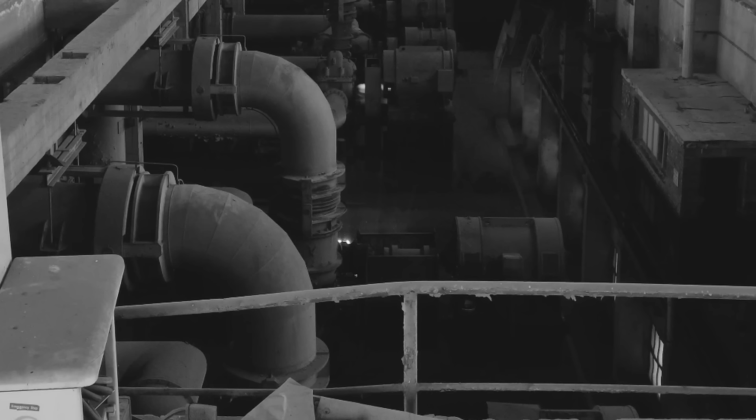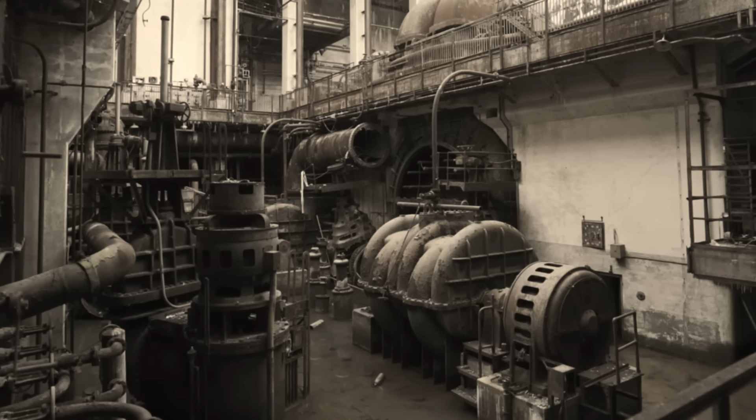But here's what makes it worse. This wasn't an accident. Every gauge, every rivet, every safety system had been deliberately compromised to squeeze more power from a machine already pushed beyond its limits. So the question isn't whether this explosion could have been prevented. The question is, how many others saw it coming and said nothing?

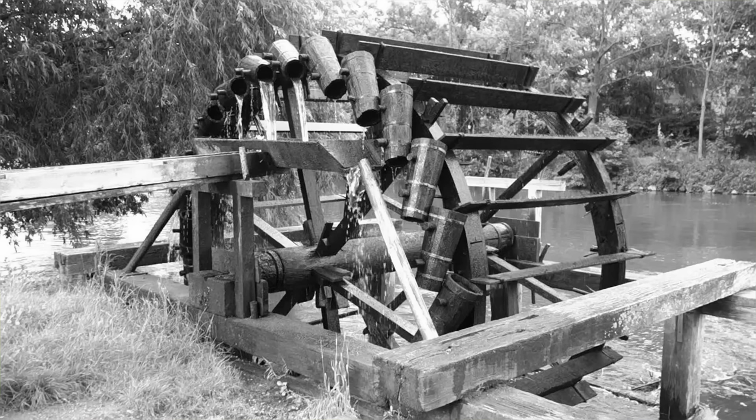Now, let's go back to where it all started, to the moment when American factories decided that more power mattered more than the men who made it run. The American factory floor in 1880 runs on a single, brutal truth. No steam, no money. Every loom, every lathe, every stamping press connects by belt and pulley to a central power source. For decades, that source was the water wheel, chained to rivers and seasonal flow.

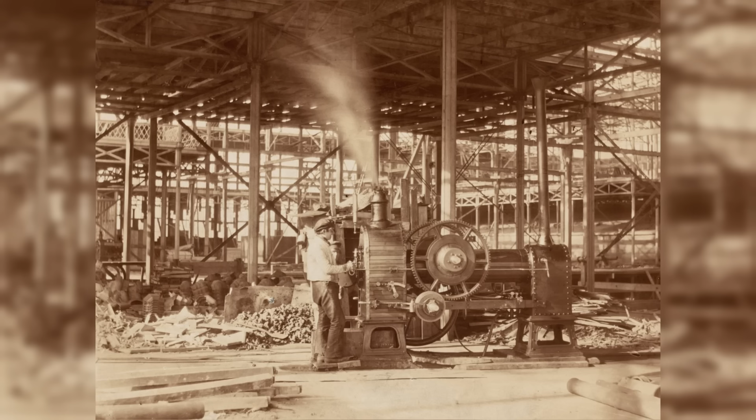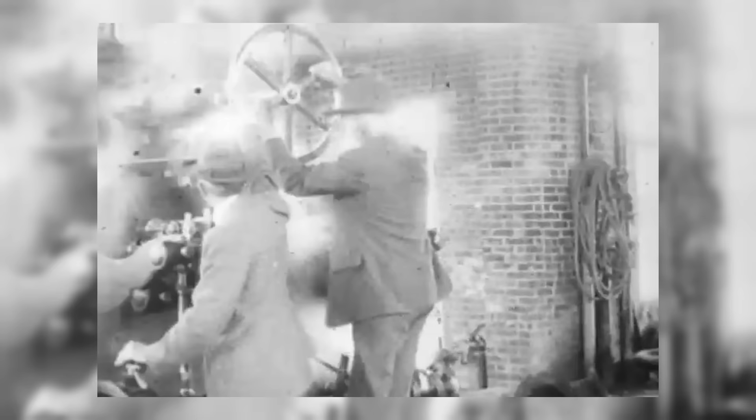One boiler can power an entire textile mill. 2 can drive a steel foundry's rolling equipment. 3, arranged in a battery, can keep a locomotive factory running 3 shifts without pause. The economics are irresistible. Install a bigger boiler, run more machines, hire more workers, capture more market share. But the pressure, literal and financial, never releases.

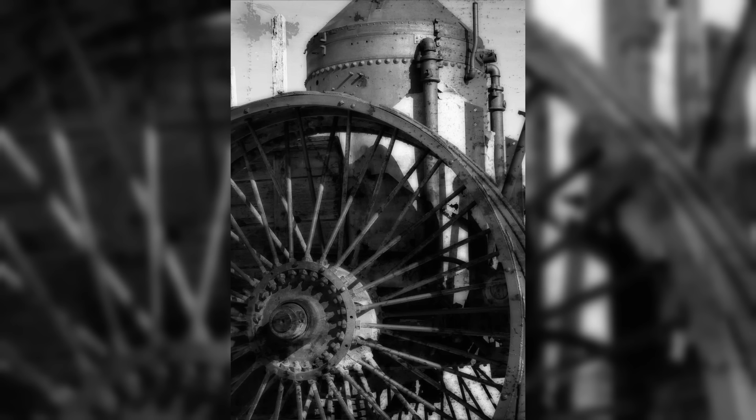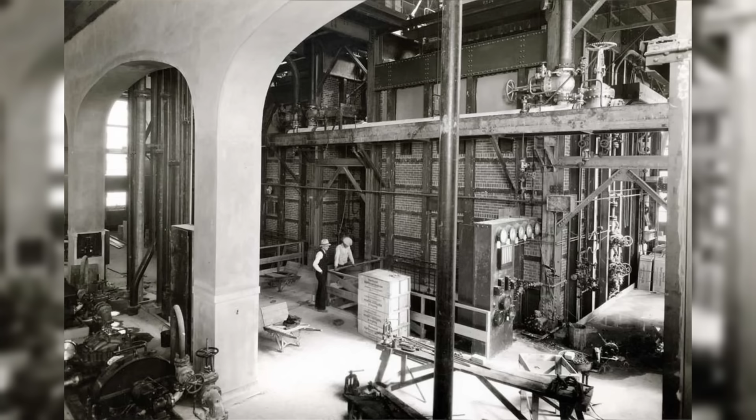Factory owners face a choice. Operate at design capacity and watch competitors outpace you, or push past the red line and multiply your output. Most choose the latter. They connect boilers in series, feed them cheaper coal with higher sulfur content, and delay maintenance shutdowns that cost production time. What happens when an entire industry decides that maximum capacity isn't enough?

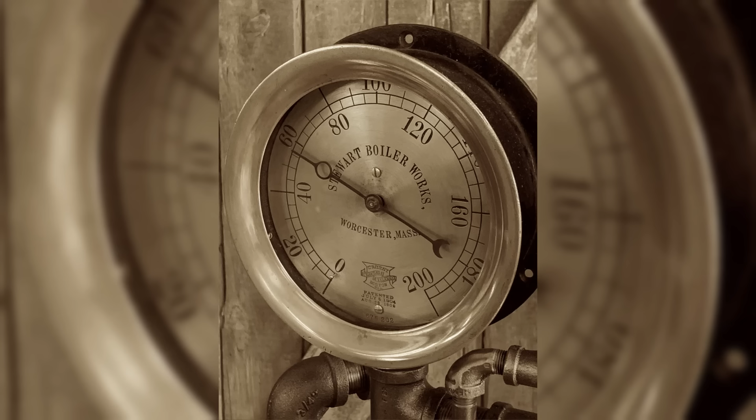The boiler room becomes the factory's literal and metaphorical heart, a chamber where heat, pressure, and human desperation concentrate into something unstable. The men who tend these iron giants work 12-hour shifts in temperatures that reach 120 degrees. They shovel coal into fireboxes that glow white. They watch gauges that measure forces capable of tearing steel. Their job isn't to keep the boilers safe. Their job is to keep it running, no matter what the needle says.

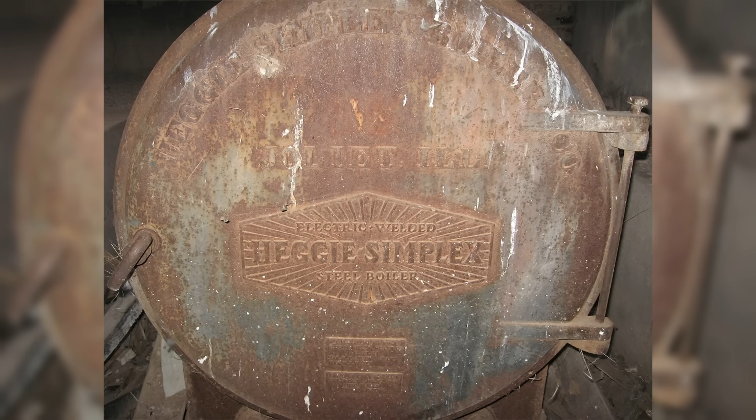By 1890, more than 100,000 stationary boilers operate in American factories, and the number climbs every year. Each one holds enough energy to level a city block. Each one operates under the same unspoken rule: production over caution, profit over safety, output over everything. The stage is set and the pressure is building.

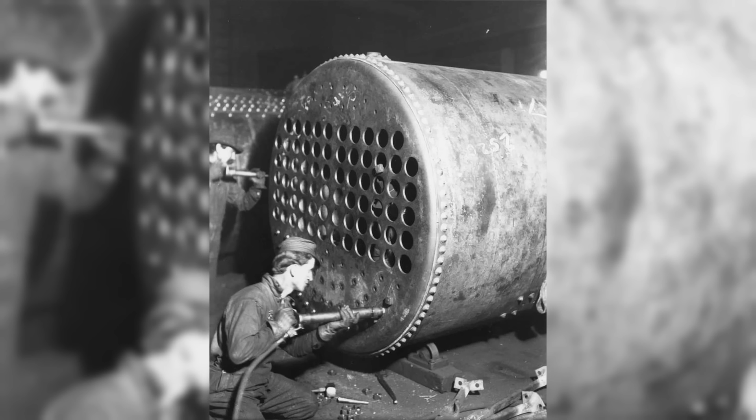A boiler shell looks solid until you understand how it's made. Thousands of hand-driven rivets hold overlapping iron plates together, each one hammered hot into pre-drilled holes by men working in teams of 4. The 1890s standard calls for rivets spaced every 3 inches along a seam, overlapped in a pattern that distributes stress across the joint.

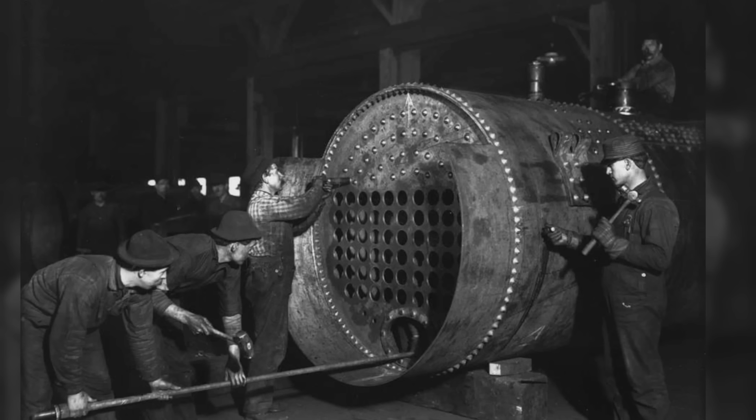Miss one hole by 1/16 of an inch, and you create a point where metal flexes unevenly under pressure. Let a rivet cool crooked, and the seal begins to weep. Multiply these small errors across a 30-foot shell, and you've built a structure that's only as strong as its weakest connection. Let me take you to Hartford, Connecticut, in 1854.

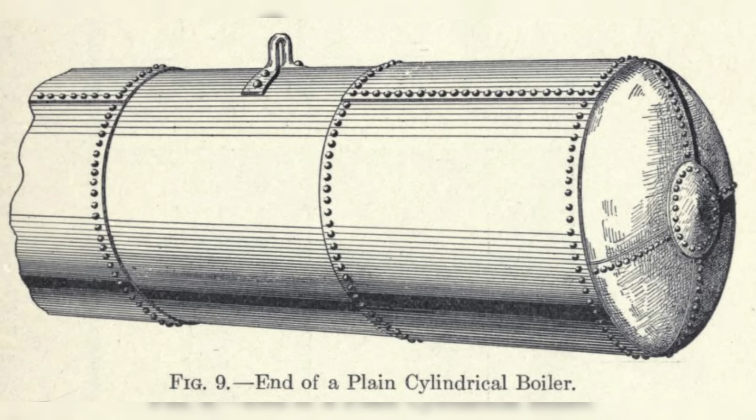The Fales and Gray Car Works boiler explodes during a routine morning startup, killing 21 workers and injuring another 50 more. Investigators recover fragments showing rivet holes drilled off-center, allowing steam to force its way between plates. The company had accepted the boiler from the manufacturer without independent inspection. The shell was defective from the day it was installed, but rivets are only the beginning.

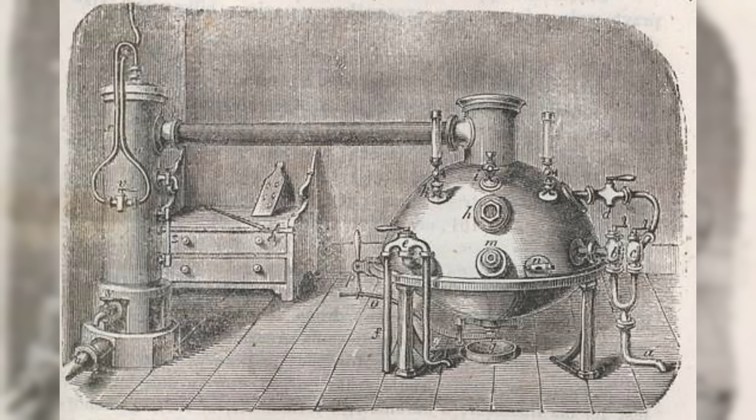Water chemistry attacks iron in ways most operators never see. Let water sit stagnant and oxygen begins the corrosion process, pitting the interior surface. Feed a boiler with mineral-heavy water and scale builds up, insulating the iron from the cooling effect of the water itself. The metal overheats, it softens. Under constant pressure, it begins to bulge.

Inspectors in the 1890s routinely find boilers with plates worn from half an inch down to the thickness of a dime, still in daily service because shutting down means lost revenue. What does a factory owner see when he looks at these warnings?

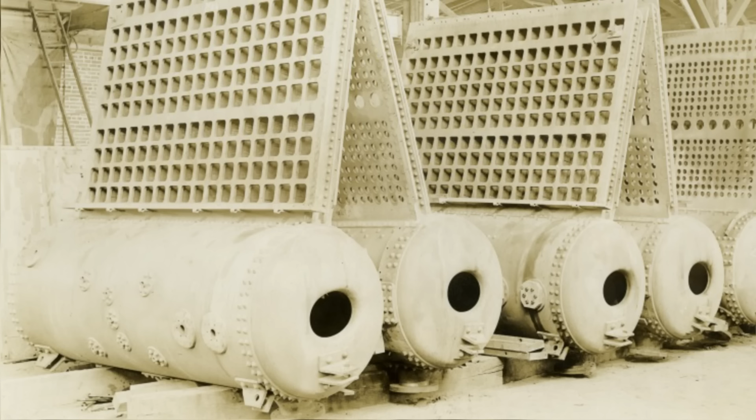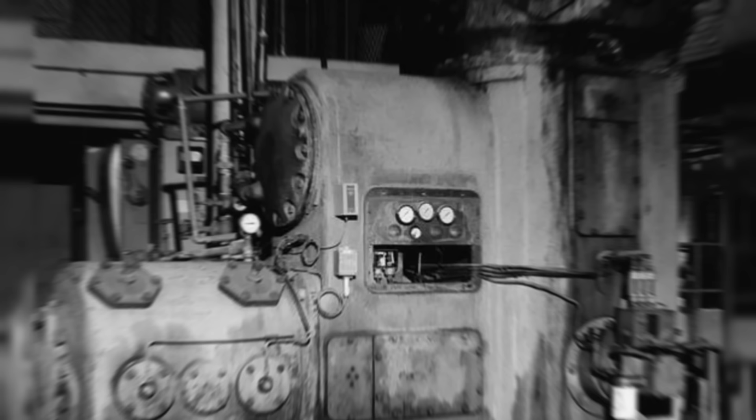The boiler inspector from Massachusetts reports finding 347 boilers in dangerous condition during 1893 alone, with 89 ordered immediately removed from service. Yet, records show that 34 of those condemned units returned to operation within 6 months, their owners having made minimal repairs or simply moved them to facilities outside the inspector's jurisdiction.

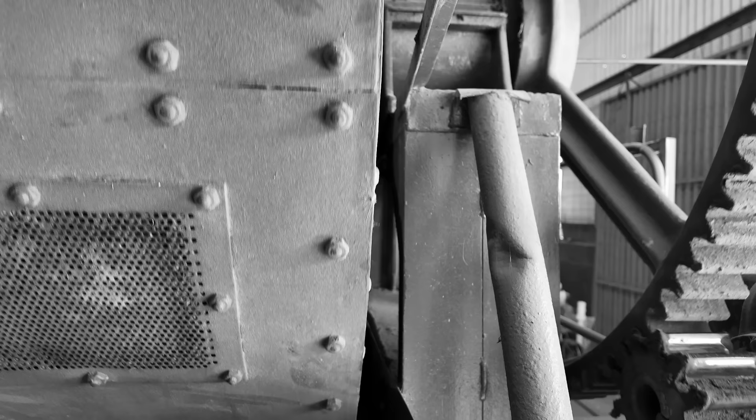The evidence is physical and damning. Recovered boiler fragments tell stories their operators never lived to share. Cracked welds, sheared rivets, corrosion patterns that follow waterlines like rust-colored maps. These aren't mysteries. These are predictions written in metal, ignored until the moment they come true.

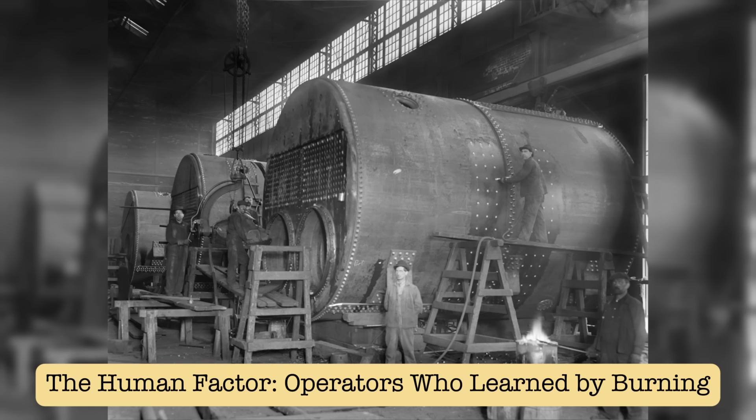The man who controls 3,000 horsepower rarely knows what he's controlling. Most boiler operators in the late 1800s receive no formal training. They learn from the previous shift worker, who learned from someone before him, creating chains of knowledge based on habit rather than understanding. A new hire might get 3 days of observation: how to shovel coal, how to check the water glass, how to crack the blowdown valve once per shift.

What he doesn't get is instruction on metal fatigue, pressure dynamics, or the physics of steam. He's told to keep the needle in the green and the water above the red line. Everything else is feel.

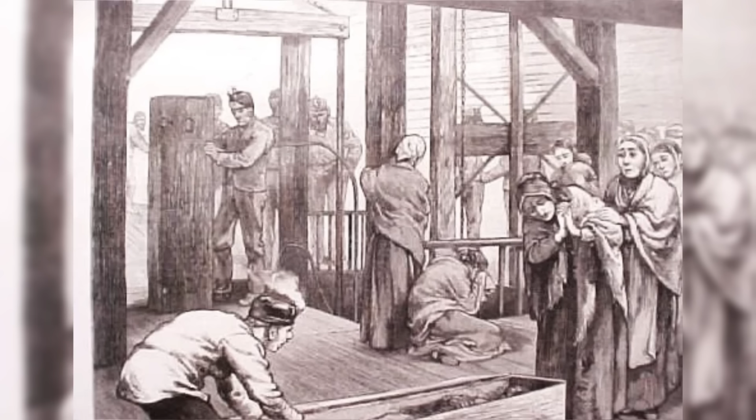Let's go back to Braidwood, Illinois on February 16, 1883. The boiler at Diamond Mine explodes during the morning shift change, killing 69 miners waiting to descend. The operator had noticed the pressure gauge climbing, but assumed it was temporary, a pattern he'd seen before during cold snaps when demand spiked. He didn't know the safety valve had frozen shut overnight. He had no training to recognize the danger. The inquest records his testimony. "I thought it would settle down like it always does."

But how do you measure the weight of responsibility placed on men who can't read the gauges accurately? Survivor accounts describe the impossible calculus. If you shut down for suspicious noises, you're labeled overcautious and risk termination. If you push through and something fails, you're blamed for negligence.

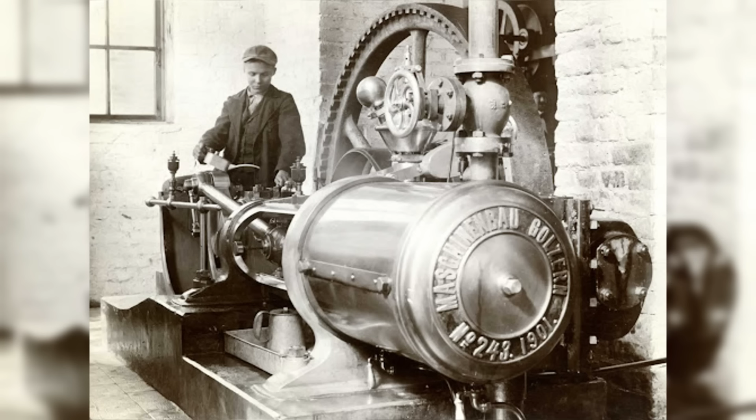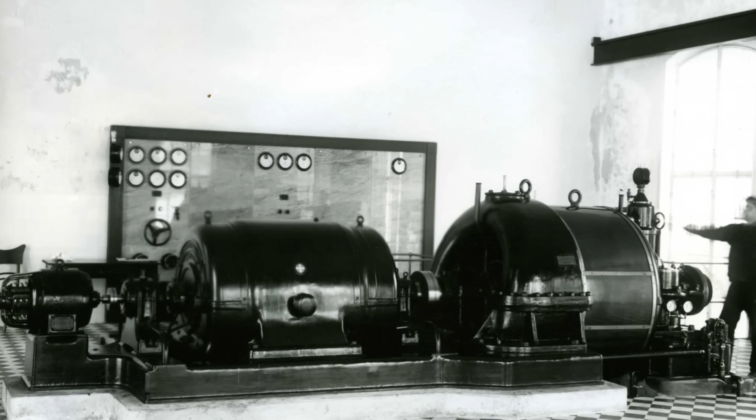The Chicago Tribune reports in 1890 that the average boiler operator earns $2.50 per day and works 6 days per week. Factory foremen, paid on production bonuses, routinely pressure operators to keep steam up regardless of conditions. One documented case from a Pennsylvania mill shows an operator fired after reducing pressure during a water supply interruption, the exact action that likely prevented an explosion.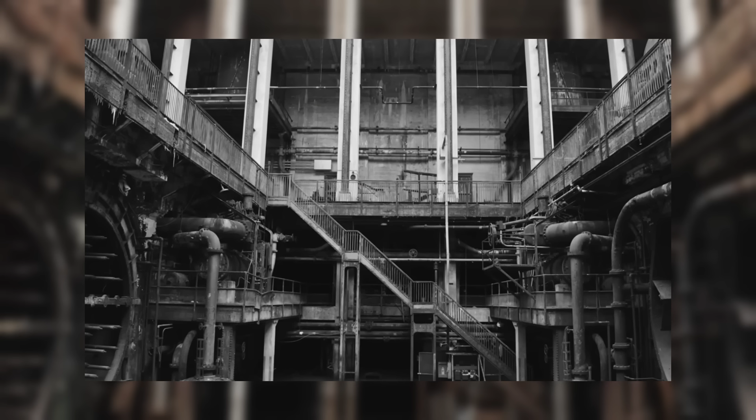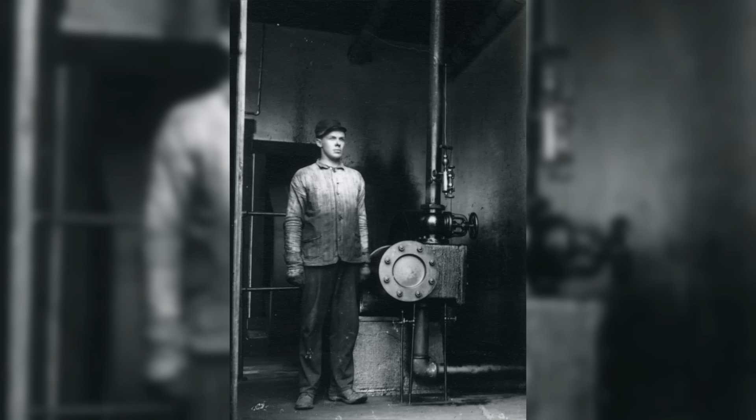The knowledge gap kills in predictable ways. Operators mistake scale buildup in water glasses for safe levels, not understanding that the mineral crust blocks the true reading. They hear banging inside the shell and assume it's normal thermal expansion. They watch safety valves weeping steam and pack them with rags to stop the leak. These aren't acts of stupidity. These are decisions made by men working with partial information in an environment where caution costs jobs and boldness keeps families fed.

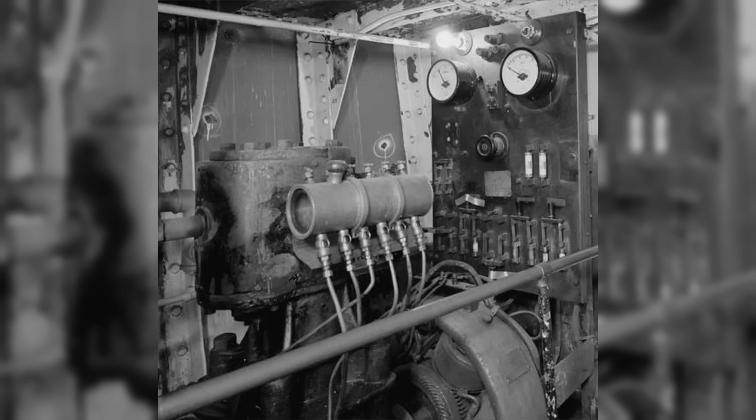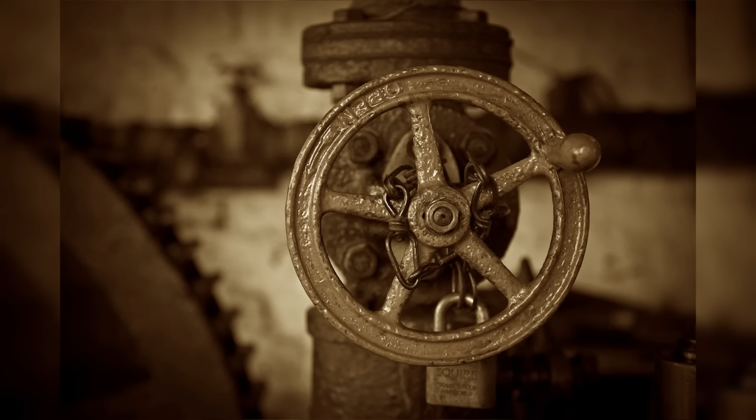The safety valve represents engineering's answer to human greed, and it fails almost immediately. The principle is elegant. A spring-loaded valve set to open automatically when pressure exceeds the boiler's rated capacity, bleeding excess steam before the shell ruptures. Massachusetts law in 1907 mandates safety valves on every boiler, calibrated to release at least 15 pounds below maximum working pressure. The valve is supposed to be the final line of defense, the mechanism that makes catastrophic failure impossible. In practice, it becomes the first thing factory managers tamper with.

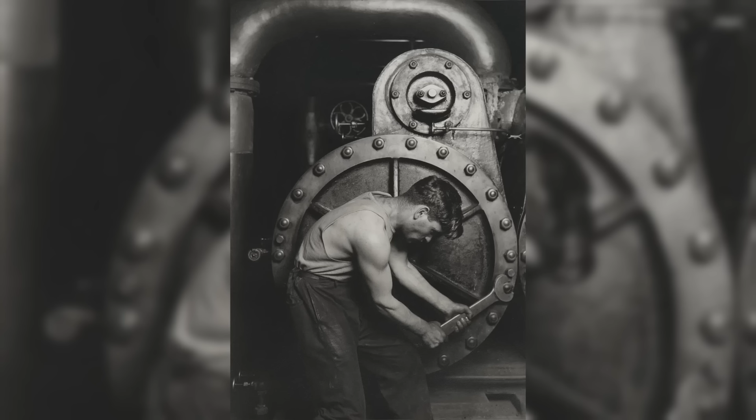The methods vary, but the goal is identical. Some owners wire valves shut with steel cables, preventing them from opening at any pressure. Others file down the valve seat, creating gaps that let steam leak constantly at low pressure, convincing operators the valve is functioning when it's actually disabled. The most common modification involves adding extra weight to the valve's lever arm, forcing it to stay closed until pressure reaches levels 50 or 75 pounds above the boiler's design rating.

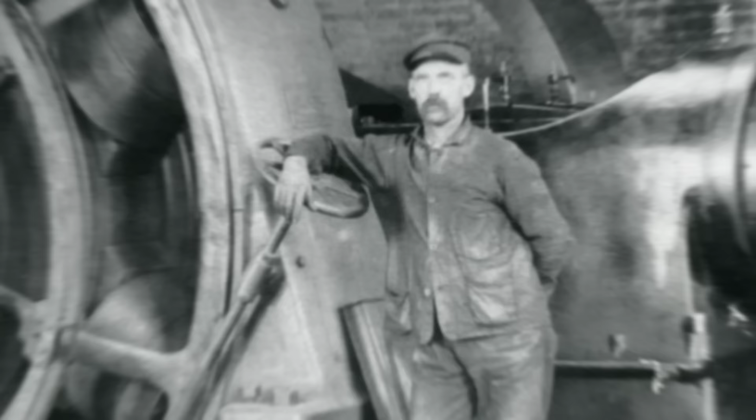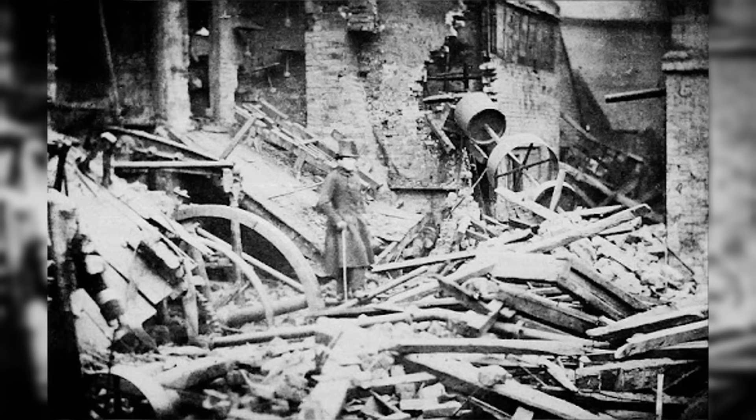Why would anyone deliberately sabotage the only device preventing an explosion? Because every pound of additional pressure means more power transferred to the factory floor, more machines running, more product manufactured per shift. Insurance company records from 1895 show that 62% of investigated boiler explosions involved safety valves that were either modified, disabled, or improperly maintained.

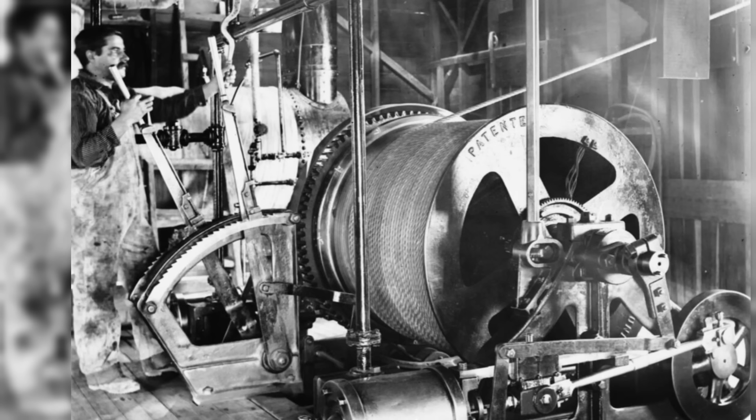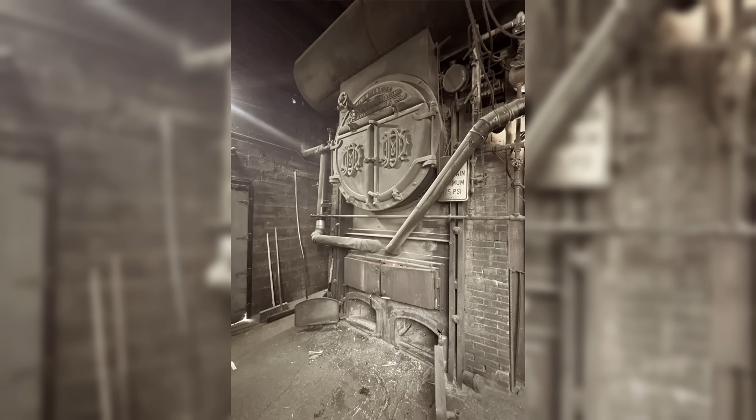The Hartford Steam Boiler Inspection and Insurance Company reports examining 4,471 boilers in 1896 and finding safety valve defects in 2,109 of them. That's nearly half. The numbers don't suggest carelessness. They suggest a system where safety mechanisms are treated as obstacles to profit rather than protection against death.

Brockton, Massachusetts, knows shoe manufacturing, but March 20th in 1905 teaches it something else entirely. The R.B. Grover Shoe Factory employs hundreds of workers across 4 floors, most of them women operating stitching machines and presses. The building sits at the corner of Main and Calmar Streets, a dense industrial corridor where factories pack shoulder to shoulder.

At 7:45 in the morning, 3 stationary boilers in the basement explode simultaneously with a force that registers on seismographs in Boston 12 miles away. The blast vaporizes the boiler room, collapses the first floor into the crater, and sends upper floors pancaking downward.

Workers on the 3rd and 4th levels fall through disintegrating floors into a pit of scalding steam, shattered brick, and twisted machinery. The building's north wall blows outward, showering the street with debris. Witnesses 3 blocks away describe a sound like artillery fire, followed by a rolling cloud of white steam that obscures the entire block. Rescue crews arrive within minutes, but can't approach for nearly an hour.

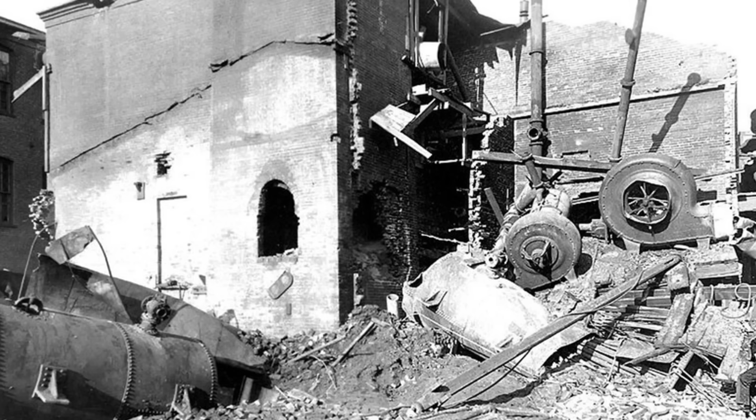What could cause 3 separate boilers to fail at the same instant? The State Inspector of Boilers reveals a cascade of negligence. The boilers, installed in 1890, had never received professional inspection. Water treatment was non-existent, allowing scale buildup that reduced heat transfer and weakened the iron through overheating. Safety valves on all 3 units were found weighted beyond their design specs, set to release at pressures 40 pounds higher than the boiler's rated capacity.

Most damning, the plant superintendent had been warned 4 months earlier by his own maintenance crew that the shells showed signs of bulging. He ordered the crew to stop mentioning it. The superintendent faces manslaughter charges but never serves time. The case drags through appeals and eventually settles with a civil penalty. Although his factory was insured, Captain Grover was financially ruined. The R.B. Grover Company declared bankruptcy and assigned its remaining assets, more than 30 Emerson shoe stores scattered around the country, to its creditors.

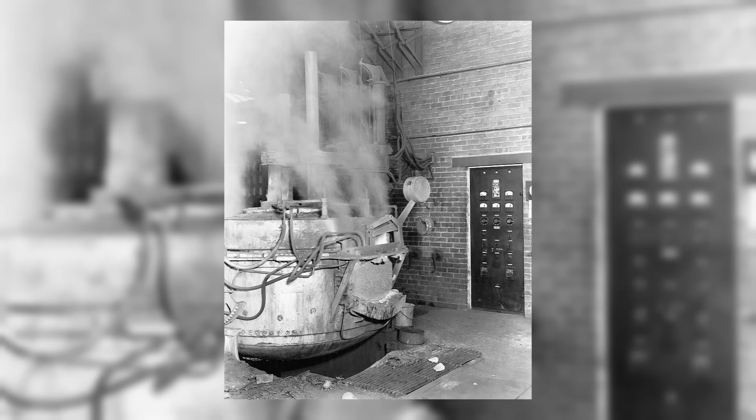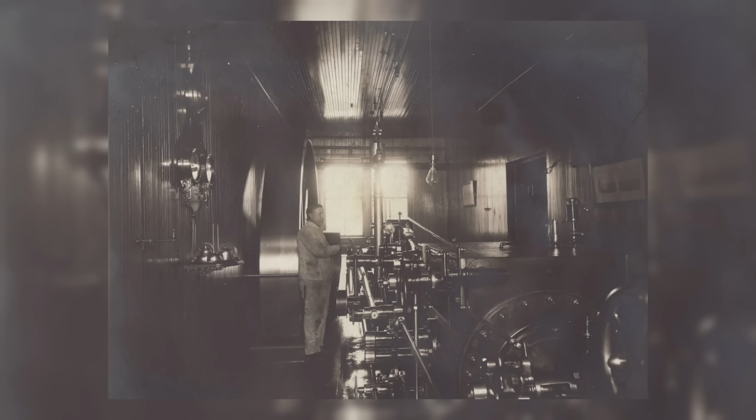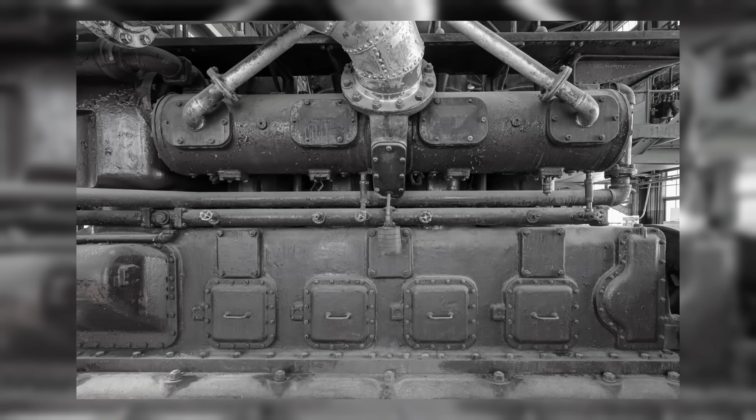Medical literature from the period describes these injuries with clinical precision. Third-degree burns covering 60, 70, sometimes 80% of the body surface. Skin peels away in sheets. Muscle tissue cooks. Survivors describe the sensation as liquid fire, a pain that doesn't fade but intensifies as nerve endings die and then regenerate. Dr. William Warren Potter, treating victims of the Park Hill shoe factory explosion in Haverhill, Massachusetts in 1898, documents the progression in the Boston Medical and Surgical Journal.

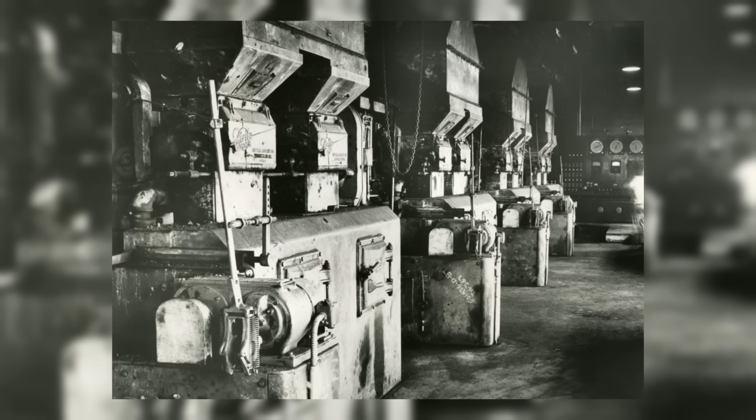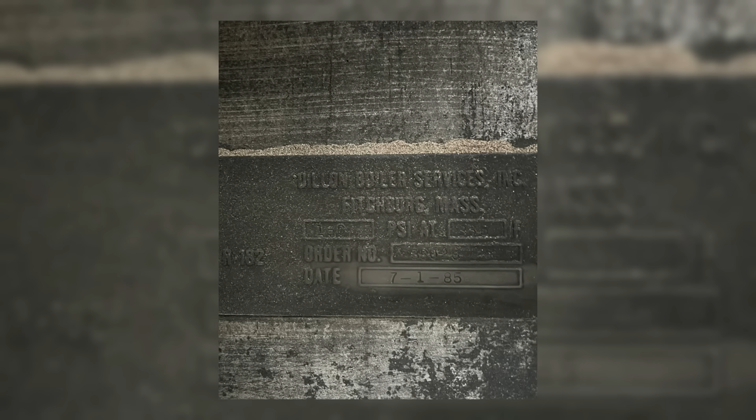Patients arrive conscious and speaking, their injuries not yet fully apparent beneath clothing. Within hours, the skin begins to separate. Fluid loss leads to shock. Infection sets in almost immediately, turning wounds septic before any meaningful healing can begin. Potter reports that of 23 patients admitted with severe steam burns, 19 die within 5 days. The survivors face months of recovery, multiple surgeries, and permanent disfigurement.

Why does steam kill more effectively than flame? The answer lies in heat transfer. Steam carries roughly 5 times more energy per unit volume than hot air. When it contacts cooler skin, it releases that energy instantaneously while condensing back into water, which then continues to burn. Fire burns the surface and moves on. Steam penetrates and lingers. Hospital records from boiler explosion victims show recurring patterns.

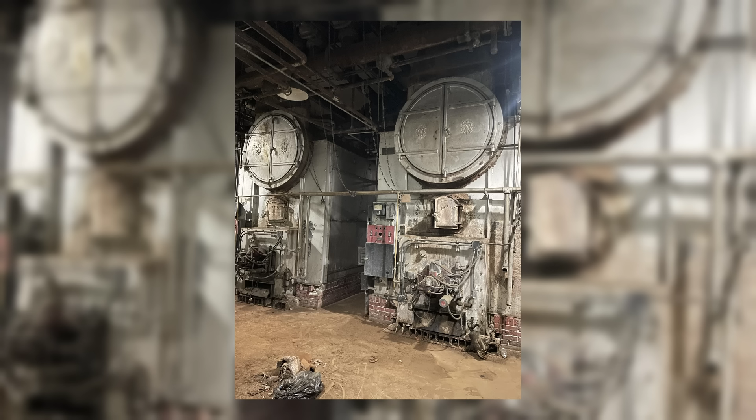Many die not from the initial burns, but from secondary infections, pneumonia caused by inhaling superheated vapor, or kidney failure from the body's trauma response. The New York Times reports on December 13, 1902, that following the Abendroth brothers' boiler explosion in Port Chester, 8 men initially survived the blast, only to die over the following 2 weeks. Doctors had no effective treatment. Morphine managed pain. Saline solutions addressed fluid loss.

Bandages stuck to melted tissue, causing additional trauma during changes. The medical profession of the era simply lacked tools to treat injuries this severe. Survival often came down to the percentage of body surface affected and whether the victim's lungs had been seared by inhaling steam. Everything else was suffering and time.

Insurance companies start counting bodies because each one costs money. The Hartford Steam Boiler Inspection and Insurance Company, founded in 1866, becomes America's first systematic investigator of boiler failures. Their agents arrive at explosion sites with notebooks, cameras, and measuring tools, documenting everything from shell thickness to rivet spacing. What they discover isn't random mechanical failure. It's pattern. The same causes appear in report after report. Owners deferring maintenance to avoid shutdown costs, operators pressured to exceed rated capacity, safety valves deliberately compromised.

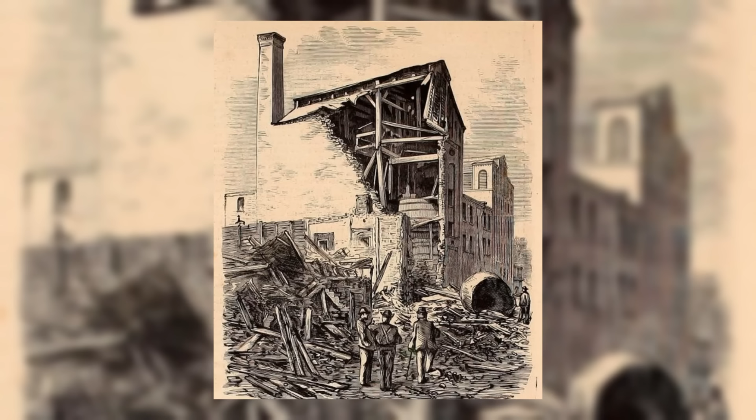By 1895, Hartford's chief engineer, Charles Pierce, testifies before the Massachusetts legislature that 90% of boiler explosions result from preventable human decisions rather than inherent equipment failure. The numbers tell a grim story. The National Board of Boiler and Pressure Vessel Inspectors, established in 1919 but compiling retroactive data, estimates that between 1880 and 1910, American boiler explosions kill approximately 2,000 people per year. That's one explosion killing or injuring someone every 4 hours, around the clock, for 3 decades. Individual incidents might claim 2 lives or 20, but the cumulative toll rivals major battle casualties without the public attention.

State labor boards begin their own investigations. Ohio's Department of Factory Inspection reports in 1894 that of 3,847 boilers examined, 1,203 show defects serious enough to warrant immediate repair, and 87 are condemned outright as unsafe for any operation. Yet the department lacks authority to enforce shutdowns. Inspectors can recommend, they can warn, they cannot compel.

Factory owners receive violation notices and continue operating, sometimes for years, until either repairs become economically necessary or the boiler explodes. What happens when evidence accumulates, but power structures refuse to act? Investigators compile devastating reports. They photograph bulging shells, corroded plates, and disabled safety mechanisms. They interview survivors who describe warnings ignored and concerns dismissed.

They calculate that proper inspection and maintenance would cost factory owners roughly $200 per boiler annually. They also calculate that the average explosion costs $15,000 in property damage alone, not counting injury settlements or lost production. The data argues for regulation.

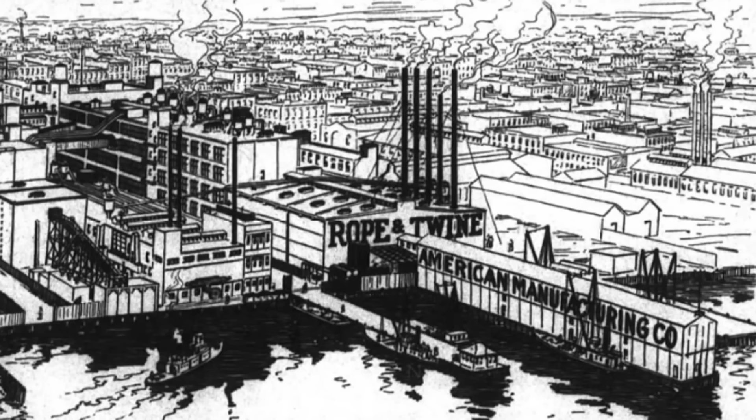Greenpoint. Brooklyn knows industrial noise, but nothing prepares workers for what erupts on an October morning in 1910. The American Manufacturing Company, the nation's largest producer of jute bagging for cotton bales, operates a sprawling factory complex covering 2 city blocks at Oak and West Streets. The boiler room sits in a 3-story corrugated iron building housing the steam plant that powers the entire operation.

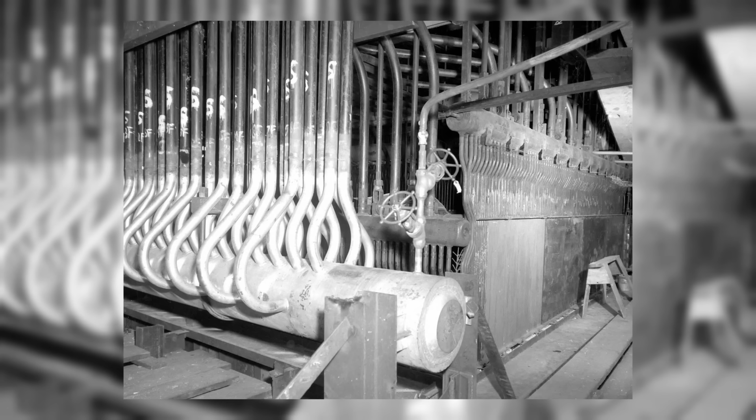Chief Engineer Edward Corcoran arrives early, conducting his routine morning inspection. He finds everything in apparent working order. At his desk 100 feet away, his wife glances out the window and sees him sitting comfortably in his wooden chair, hands clasped behind his head, taking a brief rest. It's the last time anyone sees him alive.

The explosion lifts a 40,000-pound boiler vertically through 3 floors and the roof. The massive cylinder becomes airborne, arcing over the factory yard before crashing into vacant ground near the riverfront several hundred yards from its moorings. The corrugated iron building disintegrates. The blast wave shatters windows throughout the complex and damages a frame building across the street.

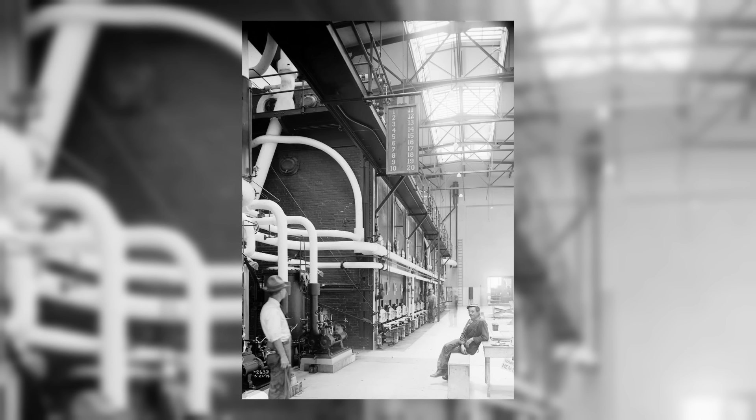Workers in adjoining sections feel the floor shake and hear what sounds like artillery fire, then rush into the streets, unsure what happened. Steam pours from the wreckage, preventing rescuers from approaching for critical minutes. How does a boiler weighing 20 tons achieve flight? The physics are identical to rocket propulsion. When the shell ruptures catastrophically, pressure releases in a directional vector.

If the break occurs at one end of the horizontal boiler and the structure is mounted vertically, the intact end becomes the nose of a projectile driven by escaping steam. The force is enormous. Hartford steam boiler investigators later calculate that the energy release equals several hundred pounds of dynamite detonating simultaneously.

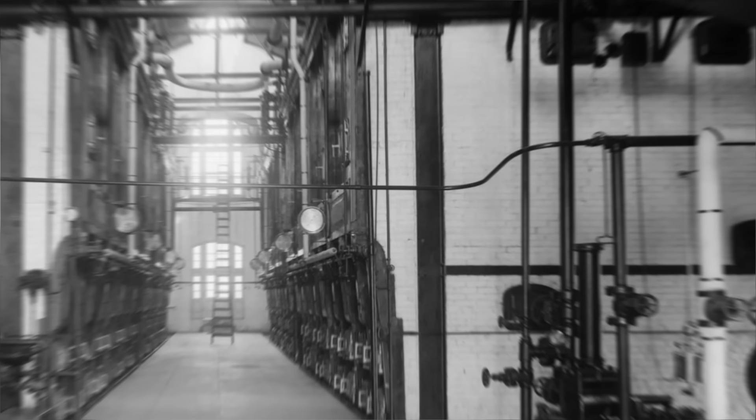6 men die, 5 instantly. Edward Corcoran and assistant engineer Dominic Permente, the only witnesses to the initial failure, perish in the blast. Fireman Andrew Doherty, laborer Patrick Walsh, and workers John McGee and Peter Peterson are killed by collapsing structure or scalding steam. 2 others suffer injuries so severe they're not expected to survive. The survivors can provide no information about what they saw or heard before the explosion.

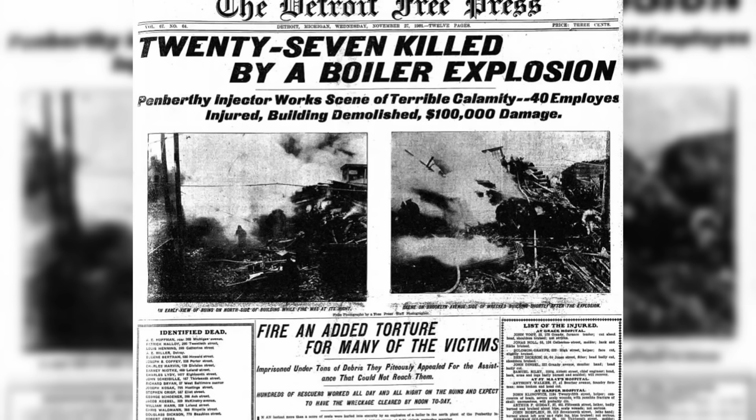Consulting engineer: the bodies pile up faster than the laws can pass. Labor unions and reform groups demand government intervention throughout the 1890s, pointing to the mounting casualty figures as evidence that voluntary compliance fails. The American Federation of Labor submits testimony to Congress in 1902 documenting almost 1,500 boiler-related deaths over the previous 18 months. Factory owners counter that mandatory inspection would cripple American manufacturing, driving costs up and competitiveness down.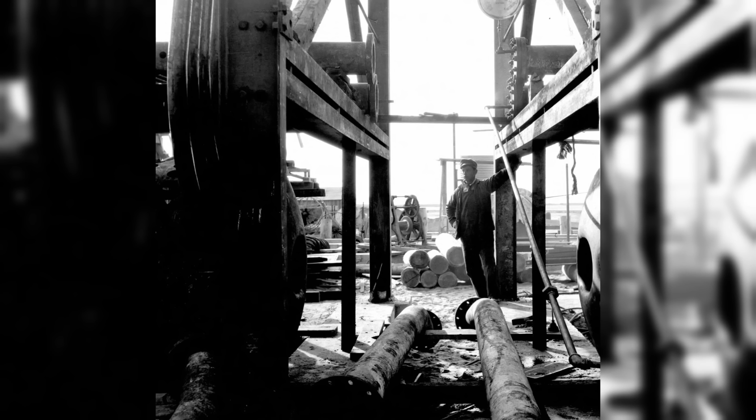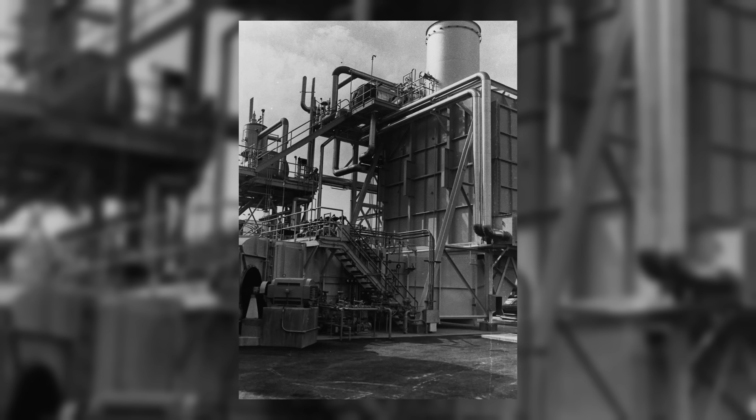The debate splits along predictable lines. Workers want protection, owners want autonomy, and legislators face pressure from both sides. Massachusetts becomes the testing ground. In 1907, the state passes the nation's first comprehensive boiler inspection law, requiring annual examinations by licensed inspectors and establishing minimum safety standards for construction and operation.

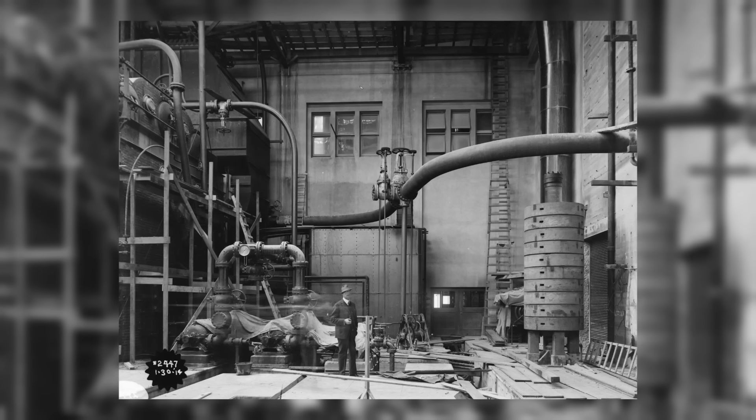Factory owners immediately challenge it in court, arguing the law violates property rights and constitutes unreasonable search. The Massachusetts Supreme Judicial Court upholds the statute in 1908, ruling that public safety supersedes private property concerns when the danger extends beyond factory walls. The decision creates a legal framework other states begin to copy, but implementation proves uneven.

Ohio passes inspection requirements shortly after, then funds only 12 inspectors to cover more than 40,000 boilers statewide. Pennsylvania's 1915 law includes safety provisions, but grants inspectors no authority to force shutdowns, only to issue recommendations. Illinois establishes standards, but exempts boilers under 15 horsepower, a loophole that covers nearly a third of industrial units. The pattern repeats across industrial states. Laws with insufficient enforcement, requirements without consequences, standards undermined by industry-friendly exceptions.

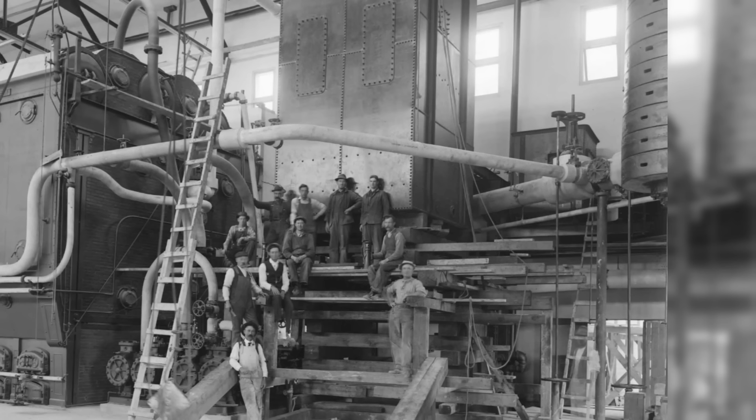What's the real cost of delayed action? Between 1907, when Massachusetts passes its law, and 1920, when federal guidelines finally gain traction, an estimated 18,000 additional Americans die in boiler explosions. The National Safety Council, tracking industrial fatalities, reports that boiler incidents rank third among causes of workplace death, behind only mining disasters and construction falls.

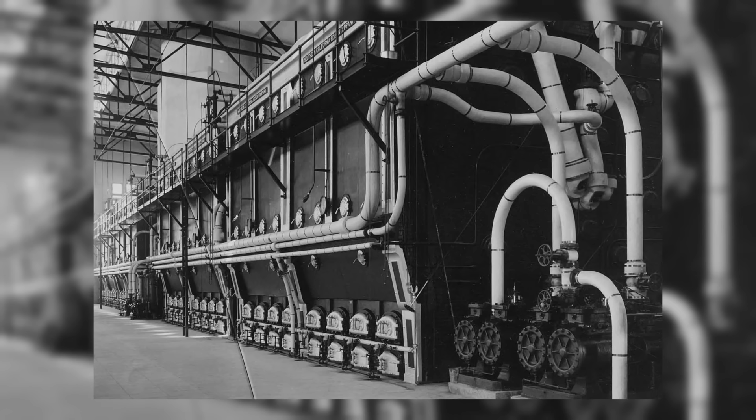Newspapers fuel the debate with graphic coverage. The Chicago Tribune runs a front-page illustration after each major explosion, showing the blast radius and body count. The New York World publishes photographs of mangled boiler rooms alongside editorials demanding action.

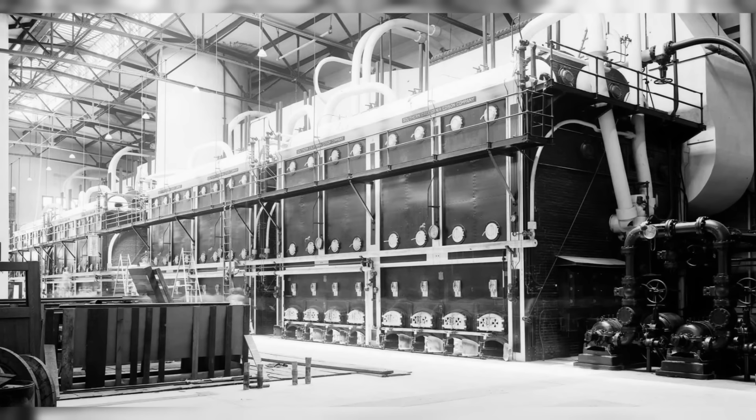Public opinion shifts gradually toward regulation, but momentum builds only after each new catastrophe proves the reformers right. The legislative process moves at bureaucratic speed while the explosions maintain their steady rhythm.

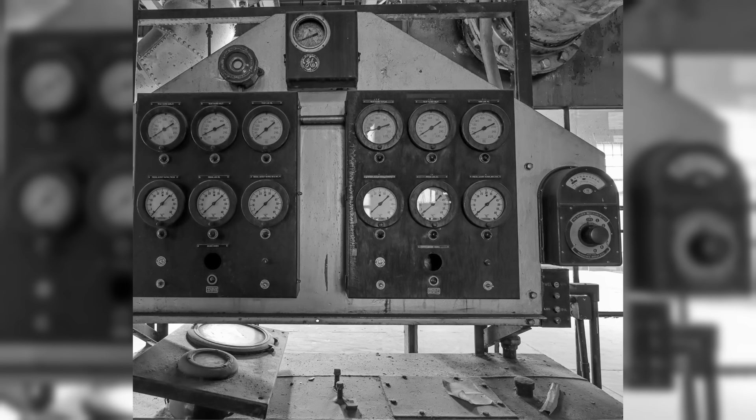The electric motor arrives quietly and changes everything. General Electric and Westinghouse begin mass-producing industrial electric motors around 1910, offering factory owners an alternative to centralized steam power. The advantages are immediate. Individual machines can run independently, eliminating the complex belt and pulley systems that connect everything to a single boiler. Maintenance becomes simpler. Startup costs drop. Most importantly, electric motors don't explode.

By 1915, new factory construction increasingly specifies electrical systems over steam, and the era of the massive stationary boiler begins its slow decline. Insurance accelerates the transition. The Hartford Steam Boiler Inspection and Insurance Company raises premiums on older boilers every year, making operation progressively more expensive. A factory running a 20-year-old boiler in 1920 pays triple the insurance rate of one using equipment less than 5 years old. The financial pressure pushes owners toward modernization, accomplishing through economics what regulation struggled to achieve through law.

World War I's industrial mobilization speeds the process. The government demands maximum production for the war effort and provides loans for factory modernization. Steel becomes available for new boilers built to updated standards, and many owners replace aging equipment rather than repair it. The National Board reports that between 1917 and 1919, more than 8,000 pre-1900 boilers are retired from service, either scrapped or sold to smaller operations willing to accept the risk.

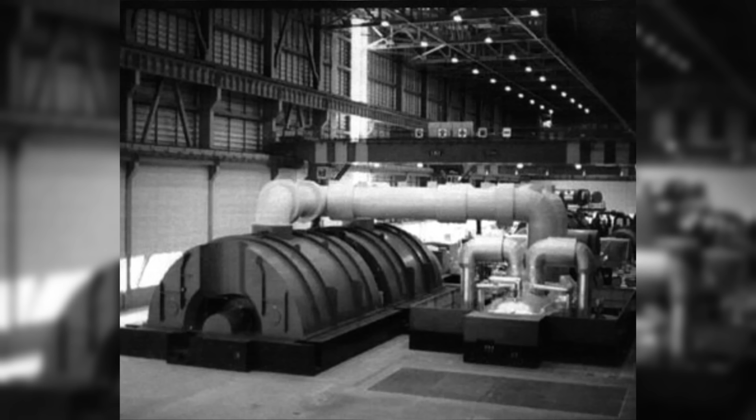But thousands remain. Smaller factories, particularly in the South and rural Midwest, continue operating steam systems well into the 20s and beyond. The economics make sense for operations that can't afford electrical infrastructure or that already own functional boilers. The Pemberton Mill in Laurel, Mississippi operates its original 1892 boiler until 1927. The Valley Cotton Mill in Roanoke, Alabama, runs steam power until 1931. These facilities maintain older technology not from preference but from necessity, accepting higher insurance costs and regulatory scrutiny as the price of staying in business.

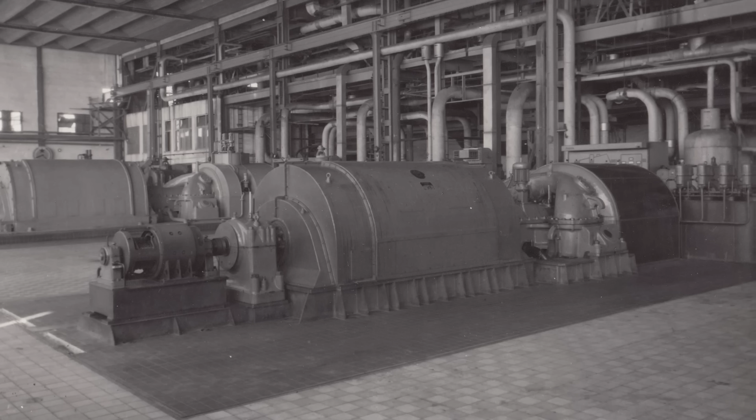The final major stationary boiler explosion occurs on April 23, 1932, at the Standard Underwear Company in Bristol, Tennessee. The boiler, installed in 1897, ruptures during the afternoon shift, killing 3 workers and injuring 11. Investigation reveals the familiar pattern: corroded shell, modified safety valve, pressure exceeding design limits by 60 pounds. Even at the end, even after decades of regulation and technological alternatives, the fundamental dynamic remains unchanged. Push it too hard. Ignore the warnings. Pay the price.

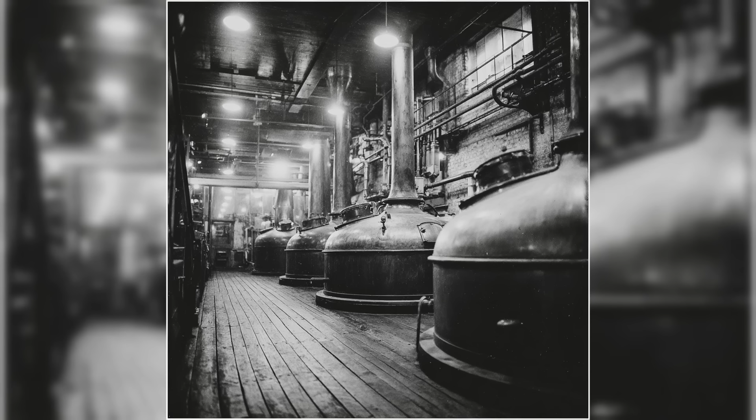The final accounting takes decades to compile, and the numbers remain incomplete. Researchers estimate that between 1865 and 1940, stationary boiler explosions killed at least 50,000 American workers and injured more than 200,000 others. The true figures likely run higher, as many incidents in smaller factories went unreported or were classified as industrial accidents without specifying the cause. What's documented beyond dispute is the pattern: preventable failures, repeated warnings, and a system that prioritized production over human life until the cost became impossible to ignore.

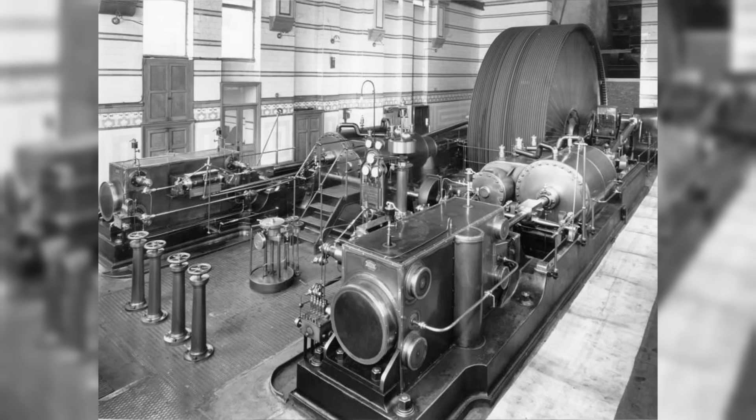But those boiler rooms left something behind besides casualty statistics. The regulatory framework born from this era shapes workplace safety to the present day. The American Society of Mechanical Engineers publishes its first boiler and pressure vessel code in 1914, establishing construction standards that become legally binding in most states by 1925. The National Board of Boiler and Pressure Vessel Inspectors, formed in 1919, creates a standardized inspection system and inspector certification process that spreads nationwide. These organizations still exist, still set standards, their authority tracing directly back to the explosion era.

The legal principle matters even more. Courts in the early 1900s established that employers cannot prioritize profit over worker safety, that the right to operate a business does not include the right to create lethal working conditions. This precedent becomes foundational to the Occupational Safety and Health Act of 1970, which creates OSHA and makes workplace safety a federal mandate. The connection runs straight from those boiler room disasters to modern safety regulations protecting millions of American workers.

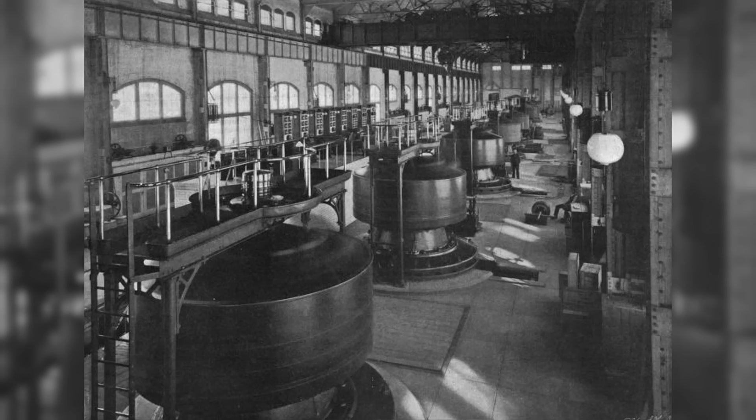Individual tragedies fade, but their lessons compound. The Grover disaster leads to Massachusetts inspection laws. The Cleveland explosion pushes Ohio toward regulation. Bristol's 1932 incident, one of the last, prompts Tennessee to finally adopt comprehensive boiler codes. Each explosion adds pressure, literal and political, until the system changes.

We end where we began, in that moment when the gauge needle climbs past red and an operator reaches for a valve that won't move. But now we understand every decision that led there, every warning ignored, every safety measure defeated by the calculus of profit. The massive stationary boilers are gone, retired to scrap yards and industrial museums. What remains is the knowledge, bought with blood and written into law, that some risks cannot be justified and some pressures must never be allowed to build.